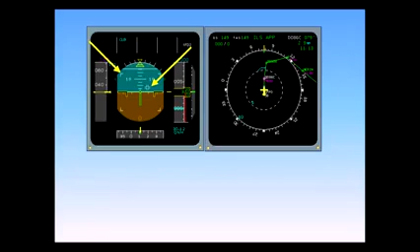Also notice the box corners toward the edges of the ADI and the Maltese cross in the center. These symbols appear after engine start and are used during the flight control check. The cross is the side stick command indicator, what the stick is commanding in pitch or roll. The box corners are stick command limits. The center of the cross should not exceed these limits when performing the flight control check.

The ground roll guidance command bar also appears after engine start, when either TOGA or flex is selected, and provided there is an operating localizer on the takeoff runway selected in the MCDU. It replaces the FD vertical bar and is used during takeoff and rollout for assistance during low visibility. All of these symbols disappear after takeoff.

When the thrust levers are placed into the flex or TOGA detent, the FMAs indicate MAN FLX 49, meaning that the thrust has been manually placed into the flex detent, and that thrust for the assumed temperature of 49 degrees Celsius has been calculated and set. Speed select 197 in blue, meaning that a speed other than the default econ speed has been selected.

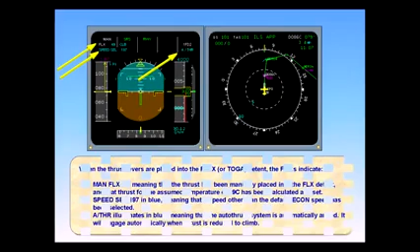A/THR illuminates in blue, meaning that the auto thrust system is automatically armed. It will engage automatically when thrust is reduced to climb. The FMA also shows SRS as the vertical engaged mode. SRS, Speed Reference System, commands the horizontal flight director bar to a pitch angle resulting in a speed of V2 plus 10 knots. Should an engine fail, SRS will command a speed of V2 or existing aircraft speed, whichever is higher.

RWY, meaning runway track, is the engaged lateral mode. Runway track is selected by simply turning the heading knob one click in either direction while the aircraft is on the ground. The heading knob must not be pushed or pulled. Runway track can be used up to 400 feet AGL to ensure obstacle clearance during initial climb in case of engine failure.

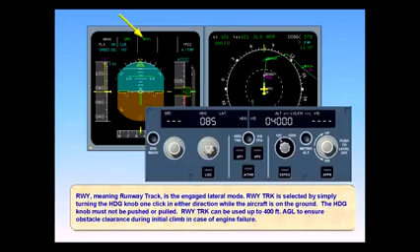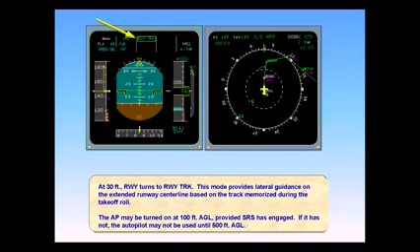At 30 feet, runway turns to runway track. This mode provides lateral guidance on the extended runway centerline based on the track memorized during the takeoff roll. The autopilot may be turned on at 100 feet AGL, provided SRS has engaged. If it has not, the autopilot may not be used until 500 feet AGL. At 400 feet AGL, the aircraft must be put into the heading mode. This is accomplished by pulling the heading knob on the flight control unit.

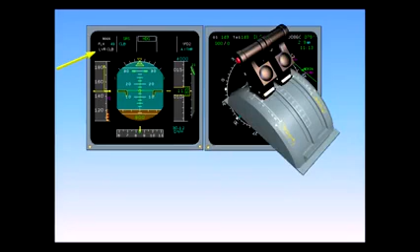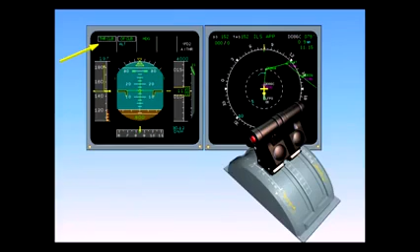At the UAL thrust reduction acceleration altitude of 800 feet AGL, a white flashing message, LVR CLB, appears in the auto thrust FMA. The FMA flashes as a reminder to set the thrust levers to the climb detent. Set the thrust levers to climb. THR CLB illuminates in green in the auto thrust FMA column, and A/THR turns white in the engaged status column. The auto throttles have automatically engaged. The system is in the thrust mode and commands max climb thrust.

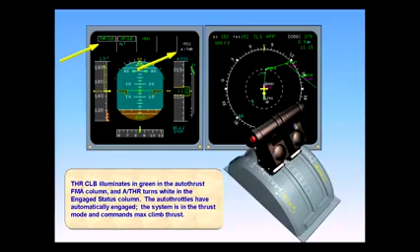Also at 800 feet, SRS has disengaged and the vertical mode now becomes open climb. Since we had changed the econ climb speed to green dot, the FMGC treats this speed as a selected speed. The magenta triangle indicating managed speed disappears and is replaced by the blue selected speed indications. Since 197 knots is off the speed scale, a blue number appears on top of the speed tape. Also, ALT is displayed in blue, indicating that the altitude capture mode is armed.

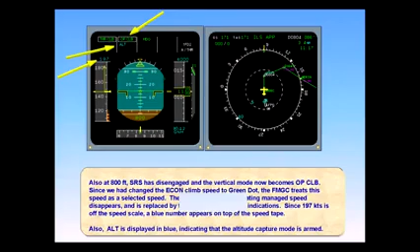The aircraft now begins to accelerate to green dot speed. 60% of the power is used to increase speed and 40% to maintain climb. Flaps and slats are retracted on schedule. Note, the selected speed number has disappeared and has been replaced by the blue triangle. At 3,000 feet AGL, the aircraft is returned to the managed speed mode by pushing in on the speed knob. Push in on the speed knob.

The aircraft is now in the managed speed mode. Managed speed indications appear on the speed tape. Since 250 knots is above the speed tape range, the indication is shown by a magenta number above the speed tape. Also note that the flight control unit's speed window has closed, the numbers being replaced with dashes, and the managed speed light is on.

The following illustration, while not yet part of United's operating procedure, is an illustration of the capabilities of the A320. While there are plans to incorporate procedures like these into the manual, at the present time the most restrictive altitude must always be set on the flight control unit.

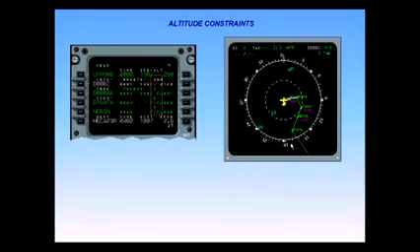The flight plan contains a SID, which was loaded into the FMGC during initial setup. The SID has an altitude restriction of 8,000 feet, as indicated by the magenta dot on the MCDU. Pressing the Constraint button on the EFIS control panel will display the restriction on the ND, whether it be a speed, altitude, or time restriction. Press the CSTR Constraint button. The Constraint button illuminates green, and the altitude constraint of 8,000 feet, which already is shown on the MCDU, is now visible on the ND.

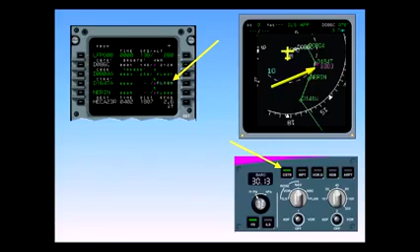We are airborne and level at 4,000 feet. ATC clears us to flight level 230, with the restriction to cross the intersection at or below 8,000 feet. First, we dial in the cleared altitude of flight level 230. Then we command a VNAV climb by pushing in on the altitude knob.

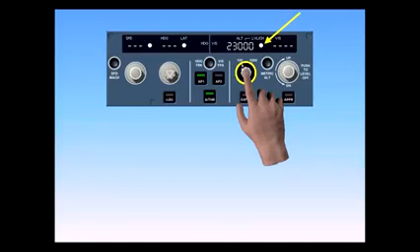Note, the level change light illuminates, indicating that the FMGC is in vertical nav, or VNAV. On the PFD, the primary indication that VNAV is engaged is climb, CLB, annunciated in green in the vertical column. The FMGS has predicted that it will reach the VNAV constraint altitude of 8,000 feet before reaching the intersection. This is indicated by the magenta level point arrow.

On the PFD, the ALT in magenta on the FMA and the target altitude 8,000 in magenta on the altitude scale indicate that the FMGC will level off and capture this restrictive altitude constraint. The aircraft is now approaching the altitude constraint. The altitude constraint mode automatically engages as indicated by the FMA. On the altimeter, the magenta target altitude indicator is moving downward.

The aircraft is now level at the constraint altitude, with altitude constraint in green on the FMA. VNAV is still armed, as shown by the blue climb on the FMA. It will automatically re-engage when the aircraft flies over the constraint waypoint. The re-engagement point is marked by the blue start of climb arrow on the ND.

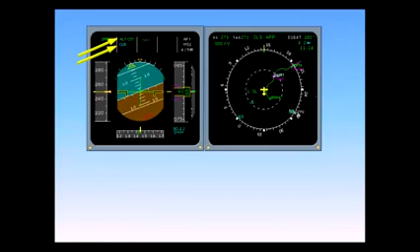You now receive a clearance to cross NERIN intersection at flight level 230, then climb to and maintain flight level 360. After entering the constraint into the FMGC, the system predicts reaching flight level 230 before crossing the waypoint, as indicated by the magenta level arrow. The system automatically reverts to the thrust climb mode, and the new constraint becomes the target, ALT and 23,000 in magenta.

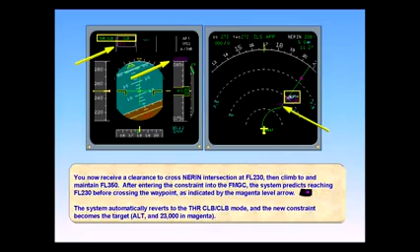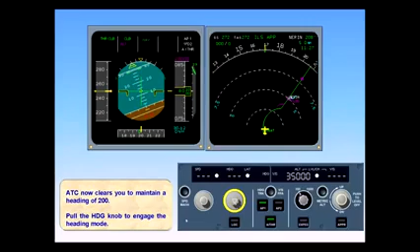ATC now clears you to maintain a heading of 200. Pull the heading knob to engage the heading mode. On the FMAs, climb is replaced by open climb, and the magenta altitude has been replaced by blue altitude in the vertical column, and heading has replaced nav in the lateral column. On the ND, the solid green line now indicates the aircraft track line, and the dotted green line is now the FMGS flight plan.

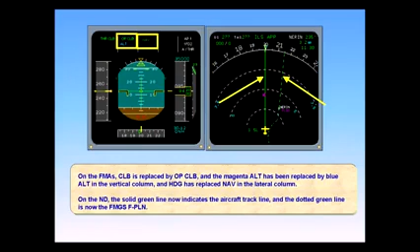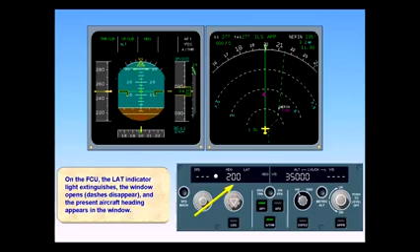On the FCU, the LAT indicator light extinguishes, the window opens, dashes disappear, and the present aircraft heading appears in the window. When the heading mode was engaged, VNAV automatically disengaged and the FMGC automatically reverted to open climb mode. ALT magenta reverted to ALT blue, and the magenta 23,000 changed to blue 35,000. Altitude capture is now armed to the FCU set altitude, not the lower constraint altitude.

When not on the assigned route, the altitude constraints which are assigned to flight plan waypoints must be disregarded. The cardinal rule to remember is LNAV must be engaged for VNAV to operate. You have now been cleared to a heading of 180 to intercept course and resume normal navigation. Since the intercept point is on this side of the TO waypoint, the aircraft will smoothly intercept. Rearm LNAV.

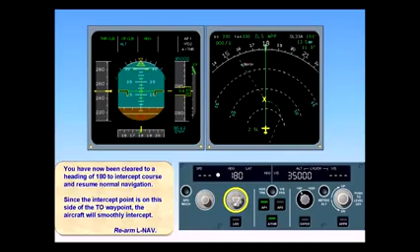Nav is now armed on the lateral FMA, blue. On the FCU, a white dot in the heading window indicates that Managed Nav is armed. On the ND, the solid green line indicates the track line to the computed intercept point, and then the remainder of the flight plan. If the intercept statement is missing, then the track line is crossing the flight plan beyond the TO waypoint, and interception is not possible without further action.

When the aircraft closes with the intercept point, the nav mode automatically engages, as seen by the indications on the FCU and on the FMA. VNAV is available again, but since there are no more constraints, it is not necessary to re-engage it. Climb and open climb will now perform the same function.

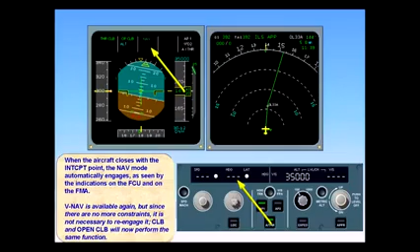Passing through the transition altitude, a yellow flashing STD message appears below the altimeter. The FMGC does not know 29.92 as anything but a QNH barometric setting. Therefore, the barometric set knob on the EFIS control panel must be pulled to set standard, STD. Pull the baro set knob. The symbol STD now displaces the baro setting. The altitude annunciation on top of the altimeter is changed to a flight level reading. Lastly, the window in the EFIS control panel now reads STD.

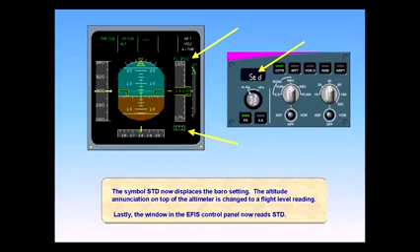You are re-cleared to flight level 290, and now ATC advises that 290 is your final. Since it cannot take radio calls, the FMGS assumes that you will continue the climb to flight level 350 and is therefore still in the climb phase, as shown on the MCDU performance page. You have to change the cruise level on the MCDU progress page. Select the progress page.

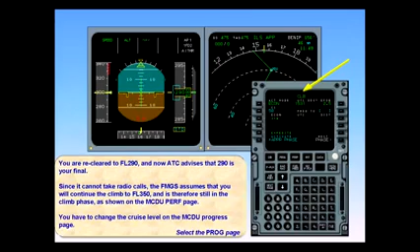Changing the cruise flight level on this page will allow the system to go into the cruise phase. The cruise Mach will be adjusted to its optimum value, which will maximize fuel economy. The new flight level is already typed into the scratch pad. Insert the new flight level. The vertical mode has changed to altitude cruise, and the MCDU page has changed to cruise, indicating that the Autoflight system is now in cruise mode.

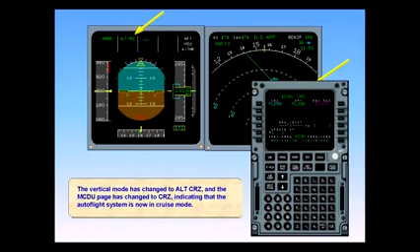The aircraft has now reached the point of descent. ATC has cleared you to flight level 270. Since it is a 2,000-foot step down, you decide to descend slowly, selecting minus 1,500 feet per minute on the FCU vertical speed and pulling the knob. Auto thrust is in speed or Mach mode. The autopilot is controlled by a selected vertical speed.

In this instance, the selected vertical speed has priority over the auto thrust speed mode. This means that if too high a vertical speed is selected, the autopilot will pitch the aircraft down to track the vertical speed target. Even though the auto thrust will command idle, the airspeed can increase significantly, even into the overspeed range.

You have been cleared to 10,000 feet. Disregarding the econ descent, you have selected 10,000 on the FCU and pulled the altitude selector. Thrust idle indicates that the FMGC will maintain the thrust at idle throughout the descent. The autopilot flight director is in open descent mode. This means that the autopilot commands the pitch so as to maintain the target speed of 280 knots all the way down to the FCU selected altitude of 10,000 feet.

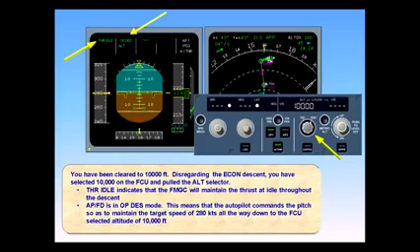As the aircraft reaches the target altitude, the speed mode automatically engages on auto thrust. Alt-star automatically engages in the vertical mode. Alt-star is the capturing mode, smoothly rounding out the level off. As soon as the aircraft is level, altitude will engage.

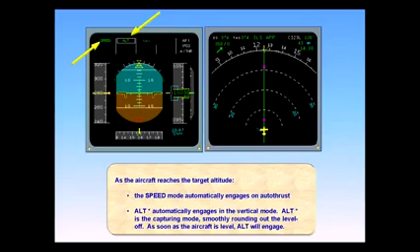We have descended to 2,000 feet and are still in the nav mode with managed speed engaged. To prepare for the approach, we need to put the system into the approach phase of flight. This is accomplished by selecting the performance key on the MCDU. It automatically displays the active phase of flight, descent. Note the prompt at line select key 6 left, activate approach phase.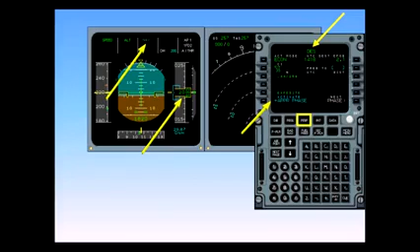Activation gives us automatic speed control if speed is in the managed mode: green dot if clean, S speed if flaps 1, F speed if flaps 2 or 3, and V approach if flaps are full. If you are still some distance from the airport and wish to activate, the use of selected speed is recommended to prevent being 40 miles out at green dot.

Note the deceleration point on the ND. The aircraft should already be in the approach phase and should have been slowed and configured for the airport traffic pattern. If it is not, activation will automatically occur when crossing the deceleration point below 7,200 feet AGL in a managed nav mode.

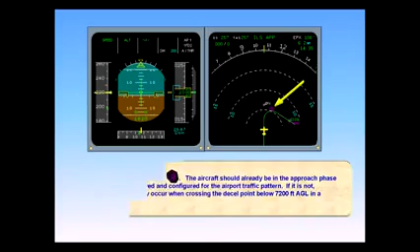If the aircraft overflies the deceleration point with managed speed engaged, the aircraft will automatically begin slowing to a speed appropriate to the aircraft configuration. Even if you are in selected speed, the approach phase will automatically activate. However, the aircraft will not slow, since a selected speed will override a managed speed.

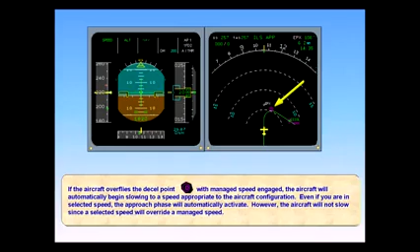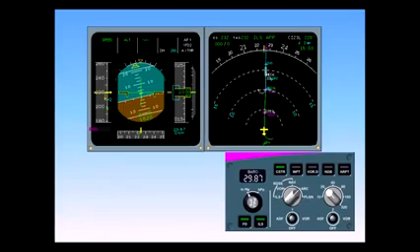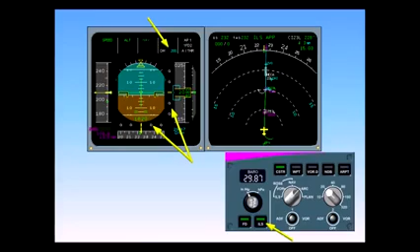You are flying an intercept course toward the ILS and have been cleared for the approach. Display the ILS raw data. The ILS switch illuminates green and the raw data ILS scales are displayed on the PFD. On the FMA, a decision height of 200 feet, previously inserted into the MCDU performance page, is displayed.

Now press the approach button to arm the approach modes, localizer and glide slope. Press the approach button. The approach button illuminates green. On the FMA, the localizer and glide slope are armed, blue. When you press the approach button, the localizer and glide slope modes become armed because you have inserted an ILS approach into the flight plan.

To accomplish an auto-land, at least one autopilot must be engaged. For complete redundancy, the second autopilot should be engaged. Auto-land requirements will be discussed later in your training. Engage Autopilot 2. Both Autopilot 1 and Autopilot 2 are now on, and the approach capability is Cat 3 Dual. This ensures the highest possible redundancy level, and thus the lowest possible approach minima.

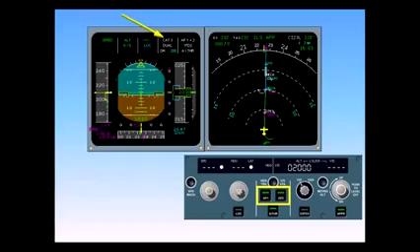The aircraft is now at green dot. Once the aircraft is 10 knots below VFE next, the amber dashes at 230 knots, the flaps can be selected to 1, and the aircraft will decelerate toward S speed. On the PFD, you can notice that the loc deviation symbol is centered, meaning that the aircraft is established on the localizer. Loc capture is indicated in green on the FMA.

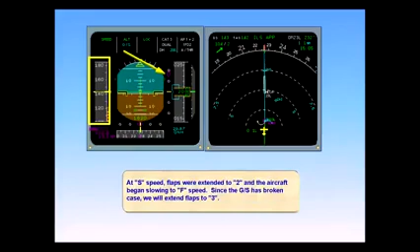At S speed, flaps were extended to 2, and the aircraft began slowing to F speed. Since the glide slope has broken, we will extend flaps to 3. The glide slope was captured at 2,000 feet with flaps 3 extended. We have successfully set the gear down, flaps full, go-around altitude on the FCU, 2,500 feet.

During the approach, as the aircraft crosses 700 feet radio altitude, ILS tuning is frozen. At this point, an FMGS change or failure does not affect the approach completion. At about 400 feet RA, the land mode engages, and any action on the FCU is disregarded. Land can be disengaged only by landing or by engaging the go-around mode.

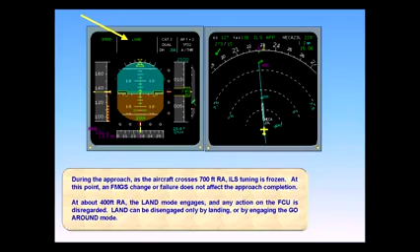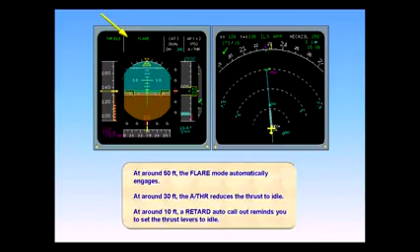At around 50 feet, the flare mode automatically engages. At around 30 feet, the autothrottle reduces the thrust to idle. At around 10 feet, a retard auto callout reminds you to set the thrust levers to idle. At touchdown, the rollout mode automatically engages, and the ground roll command guidance bar is displayed on the PFD. The autopilot tracks the runway centerline using the localizer signal. Use reverse thrust and brakes as required. Switch autopilot off at low speed.